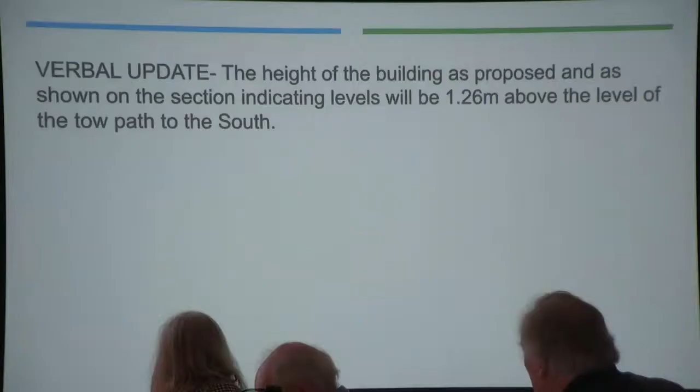The site is located to the north of the canal and to the south of the railway line. It's within the conservation area, the Bath World Heritage Site, and a site of nature conservation interest. The site is not within the Greenbelt.

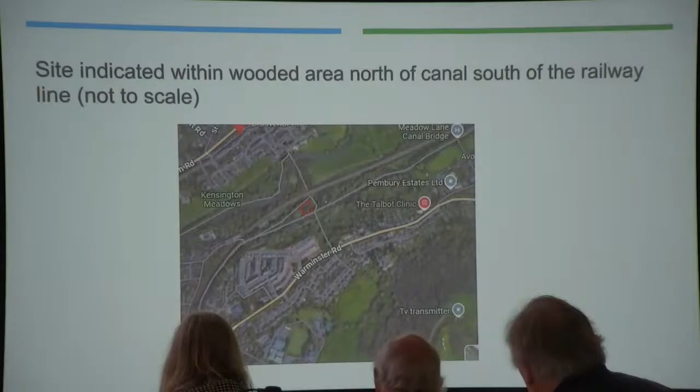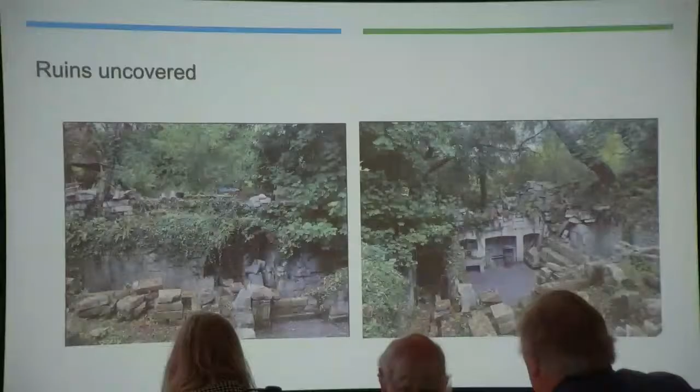The whole site, within the blue edging, as shown on the initial plan, is now the subject of a TPO.

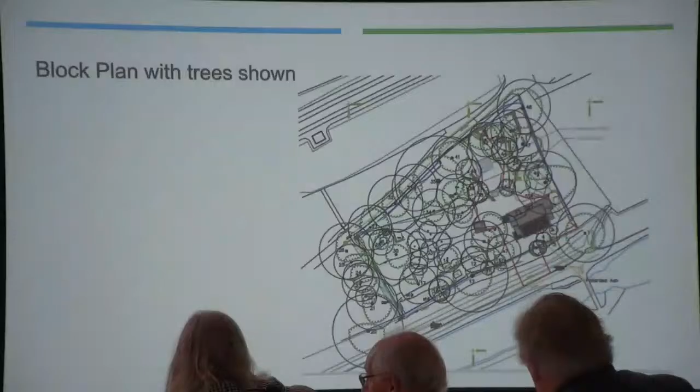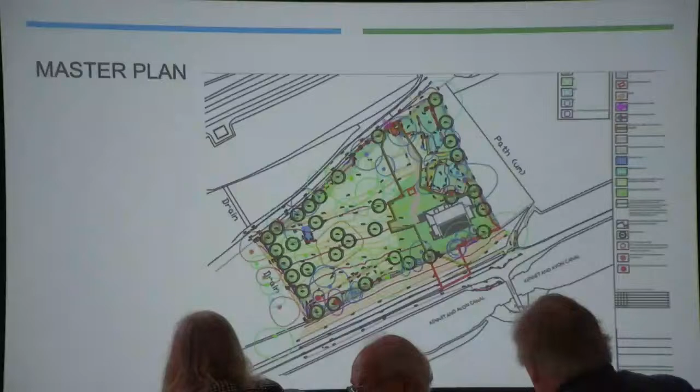A question has been raised - obviously there's a lot of ash trees on the site, so the tree officer did raise the point that there may be a lot of trees that will need to be removed due to ash dieback.

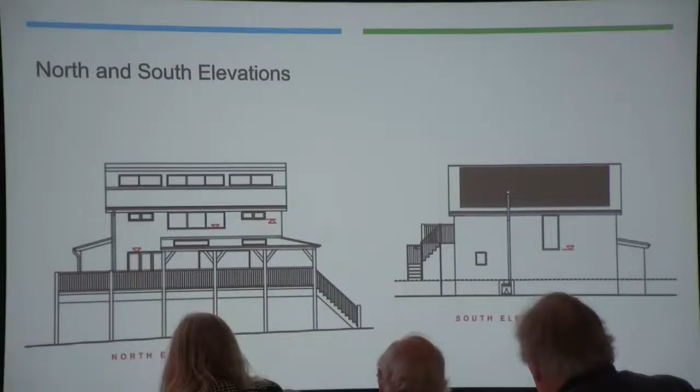I think it's probably a little bit clearer when I show you the side elevations. As you can see, the south elevation is sort of at the top of the slope, whereas the north elevation will be cantilevered out because of the topography of the site.

The building will be built of hempcrete, an off-white lime plaster. The roof will be natural slate. There'll be solar panels on the southern roof slope, and there's a 2-metre wide veranda across the northern elevation. The single-storey elements will be constructed of Bath stone, with a single-storey element at each end of the property.

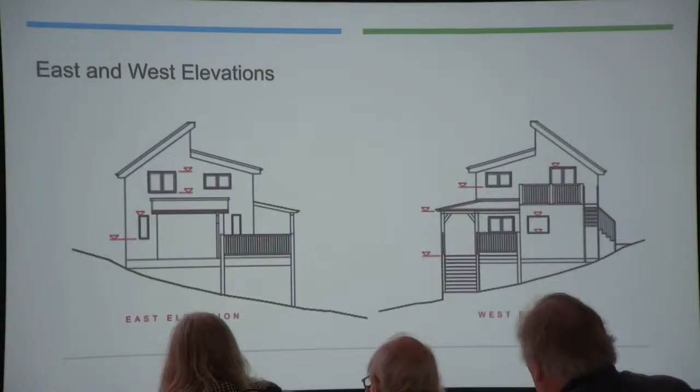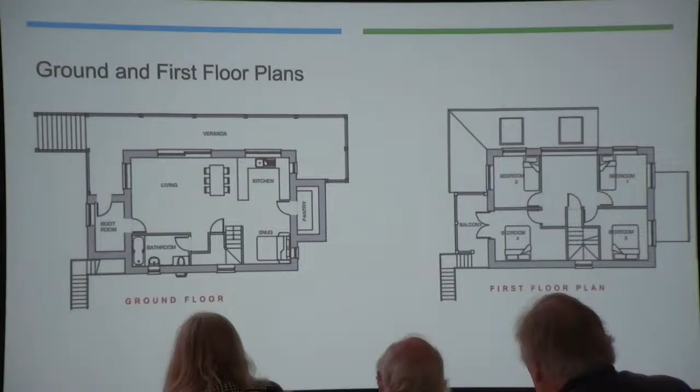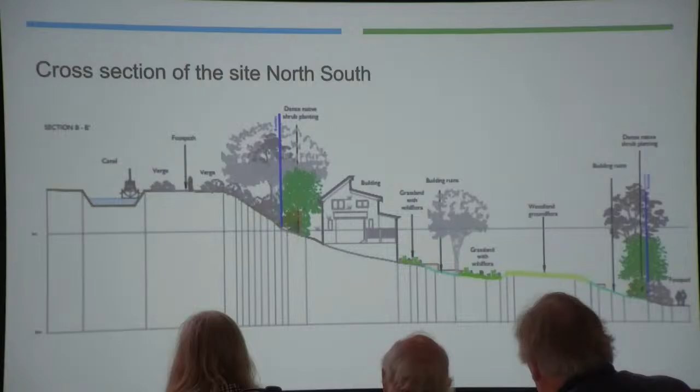This is a cross-section going lengthways through the site, and just shows that actually where the house is sited, the site is relatively flat. So as the site goes down the hill, it's fairly flat across, as it runs parallel to the canal.

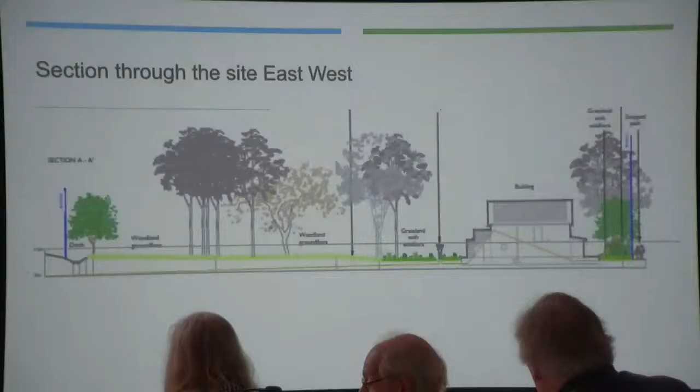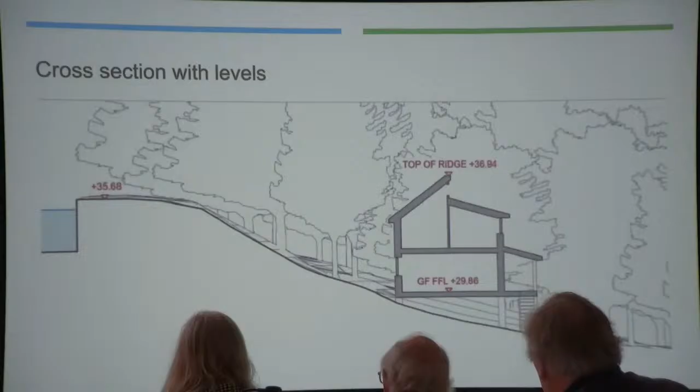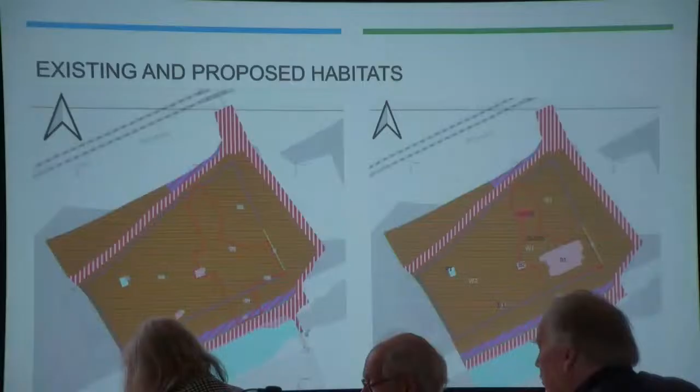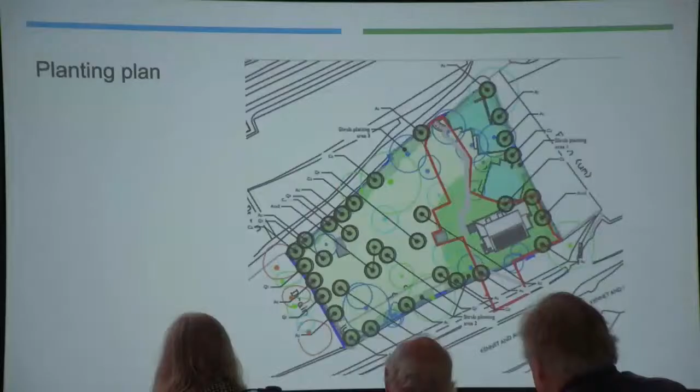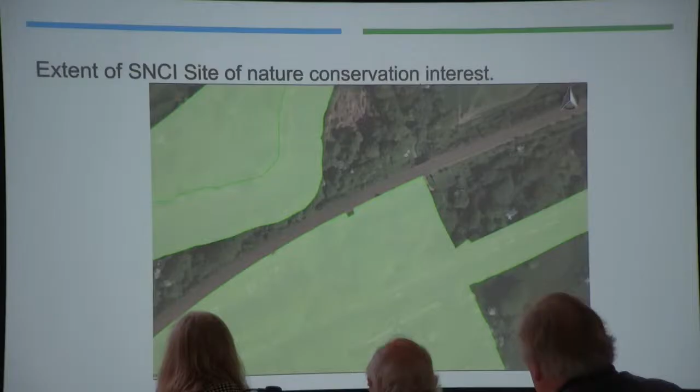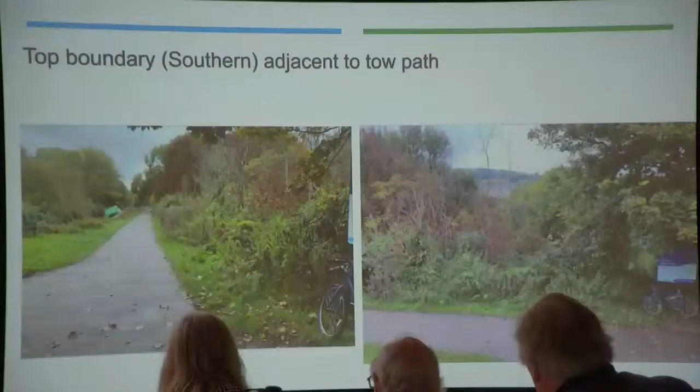Got some photographs now. Because the site is fairly heavily wooded it's quite difficult to get photographs, but hopefully this gives an indication of what we're looking at. So we're looking at the towpath, looking west with the site on our right-hand side, and the right-hand photograph is looking down towards the site, which is set down below us.

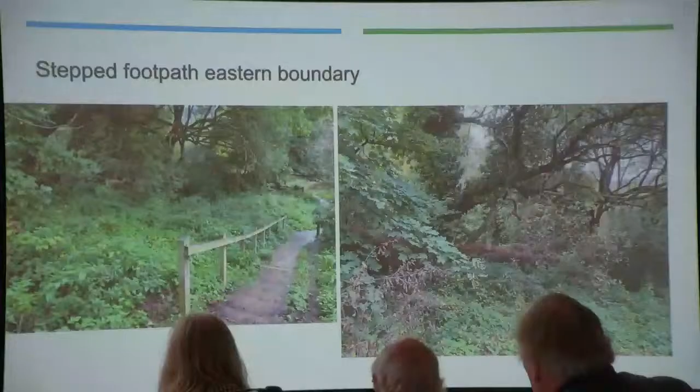Once you get down to the bottom, you have the archway of the railway line, and then the footpath turns. You can carry on straight under the railway line, or turn left, and it goes towards Hampton Row.

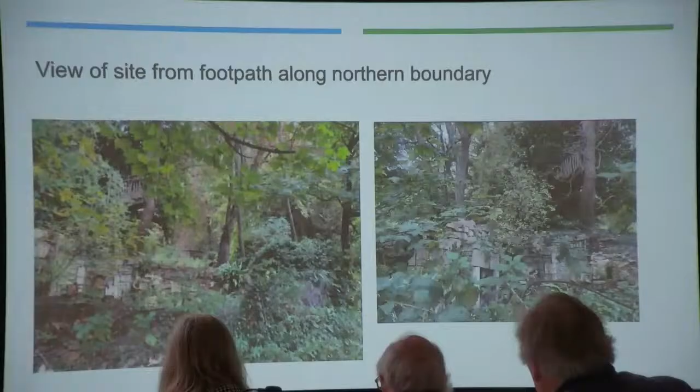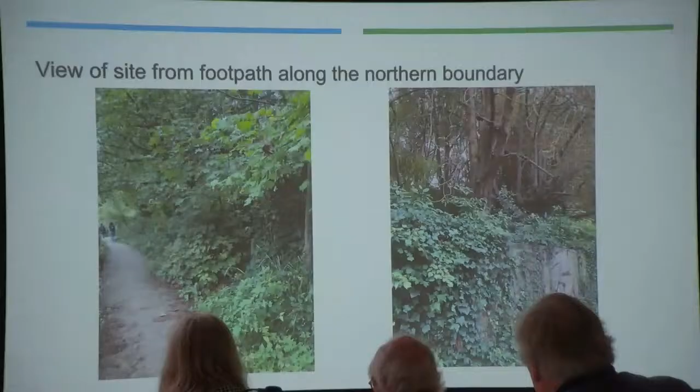As you walk along the bottom footpath, which runs along the northern boundary of the site, these are some views into the site, and you can see the lower ruins which have been uncovered. Again, this is walking along the lane at the bottom of the site, along the northern boundary, and these are views of what you see into the site.

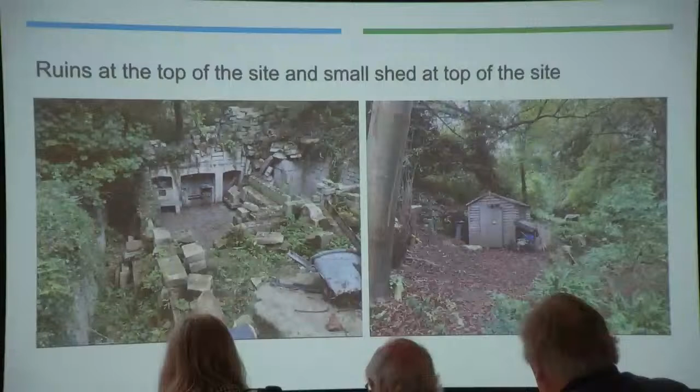Once in the site, at the bottom end, if you look to the right there's an area with a very large tree, and just at the moment there's a trampoline there. To the left there's part of the ruins which have been uncovered. As you get to the top of the site, there's a small shed, and there's also the larger ruins which have been uncovered, set down in front of where the new dwelling will be located.

This is the top of the site. There's a shed there at the moment which will be included within the curtilage of the property, and it's just overgrown with trees along the boundary.

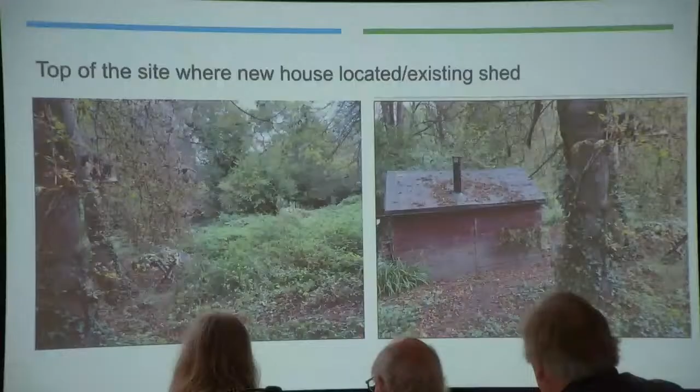This is looking up into the site, so the house will sit within these views as you look up. This is looking from the towpath - you can get down into the site. There's a little staircase, and these are two photographs looking from the stone steps across to where the house will sit.

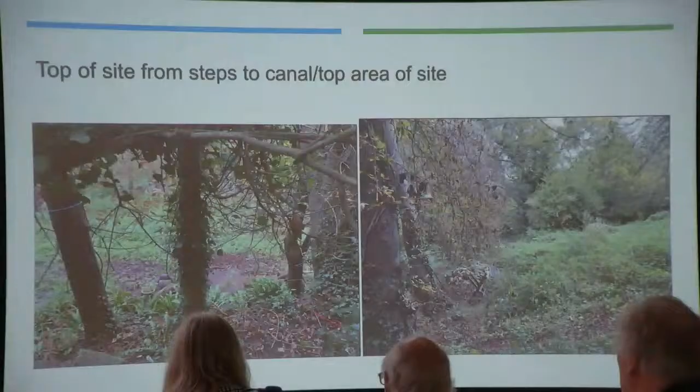The application is recommended for refusal. The reasons for refusal are in respect of the following matters: ecology, the Habitats Regulation Assessment, character and appearance, heritage impact, and impact on trees and woodland. Thank you.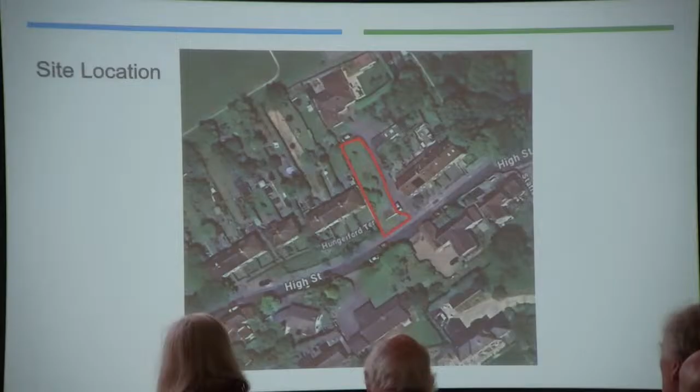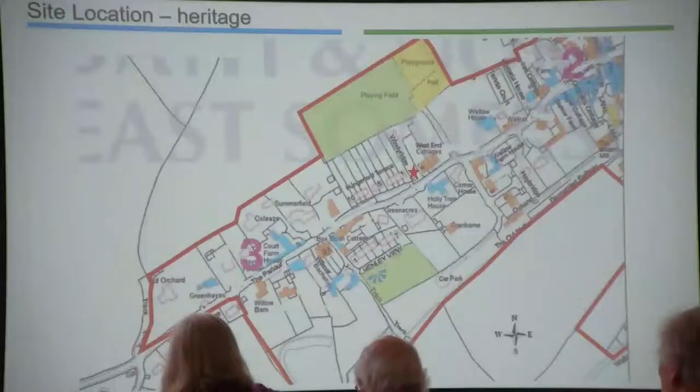So this sets out the heritage context for the site. The site and location of the dwelling is indicated by the red star. The property to the south, highlighted in blue in this image, is the Grade 2 listed building. The orange terrace, known as West End cottages, is highlighted in the conservation area character appraisal for Wellow, which is where this map is taken from. And that cottage is highlighted because of its contribution to the conservation area.

So we have some site plans on the left. We've got the existing and proposed on the right. So the dwelling is sited up the length of the garden. The central area is a dual pitch roof, and then to the west and to the rear we have some 2-storey flat roof sections as well. To the rear there are a couple of outbuildings proposed, one to include the bike store workshop and another garden store, and then parking is to the rear. Access is proposed to be widened to allow for suitable visibility.

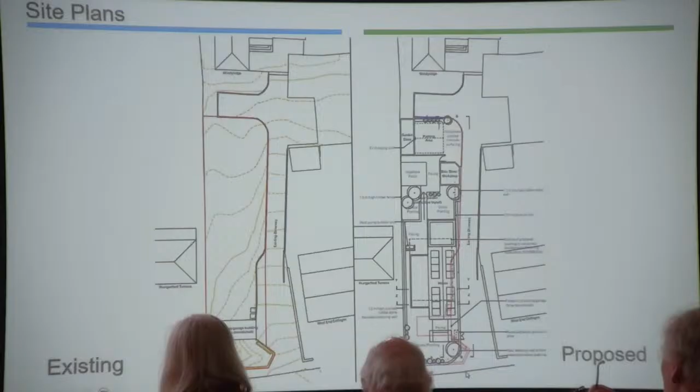This is the existing and proposed street scene, so along the High Street. Obviously at the bottom we've got the proposed. That dashed line which is shown on the proposed street scene is the outline of the previous approval, which is an extant scheme for the site for a single dwelling. And that just gives some context in terms of heights for the previous approval, the proposed, and then in relation to the terraces either side.

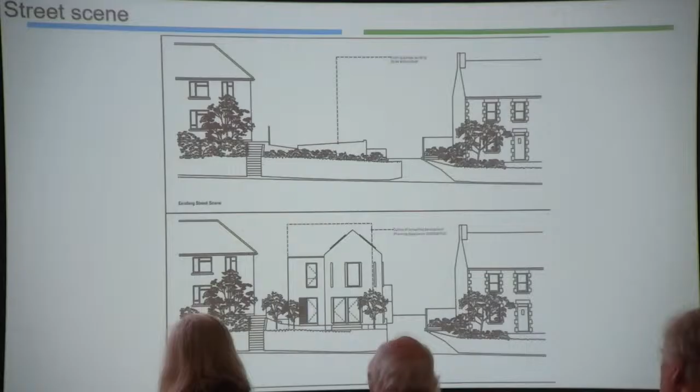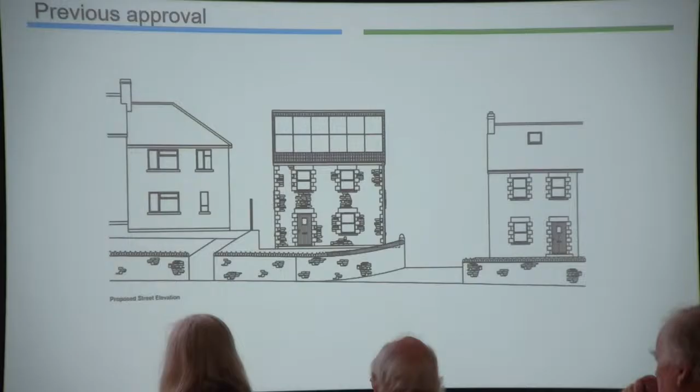This is just to show the extant permission. There have been 2 permissions on site for a dwelling of this nature. This one is the latest one, which is still live and could be implemented.

And then just some site photos. So this is the site in question. The location of the garage is kind of the front portion of the site where the dwelling's proposed, and then it would run up the length of the garden. To the rear, in the background there, you've got the property known as Windy Ridge. We've got the Hungerford terrace to the left of the image, and then we can see the side gable end of the West End cottages as well.

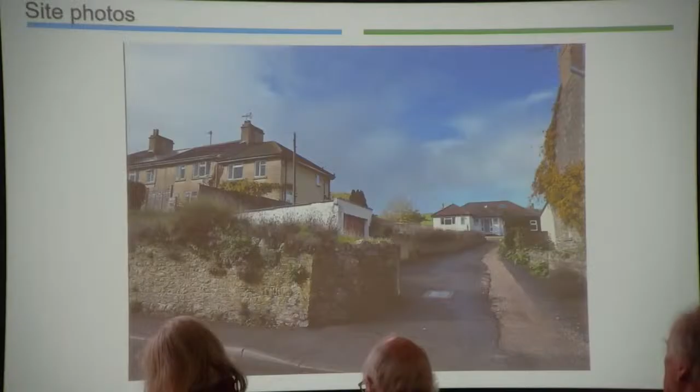And then just a closer up view of the existing garage there, and you can see the elevation of the ground level.

Officer recommendation is to refuse the application. The first reason for refusal is its impact due to its form, scale and massing - it is considered that the design does not respond to the character and appearance of that area or its local context. The second reason for refusal is in relation to the heritage asset, the conservation area, identified as less than substantial harm with no public benefit to outweigh that harm. Thank you.

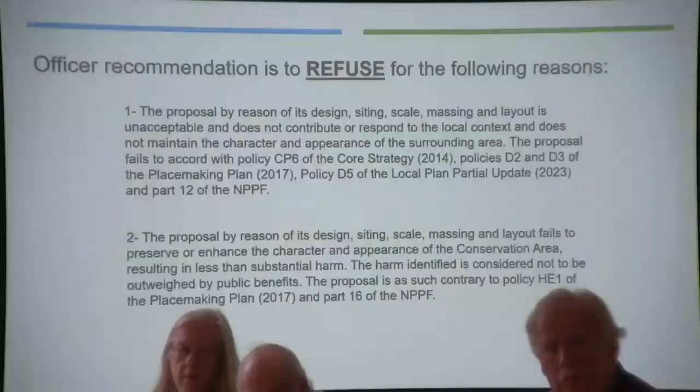I'm Mike Clarkson, I'm a Wellow Parish councillor, and I'm speaking in support of Mr. Rayner's application. When deciding to support the application, the Parish Council's only concern was the choice of orange brickwork as part of the external surfaces, and we note that Mr. Rayner has taken our comments into consideration.

The proposed dwelling replaces a rather ugly garage, and its design, although modern, incorporates features which are typical of our conservation village. The buildings on either side consist of Victorian cottages and post-war social housing and are without any great architectural merit. Therefore, the new design doesn't detract from the immediate surroundings.

The west end of the village contains an eclectic mix of older and modern designs, and we feel that the proposed dwelling, which incorporates a number of 21st century environmental benefits, adds to the interest and diversity of that part of the village. Wellow Parish Council is keen to encourage the construction of additional family dwellings within the constraints of infill and the housing development boundary. Therefore, we urge the committee to permit the application. Thank you.

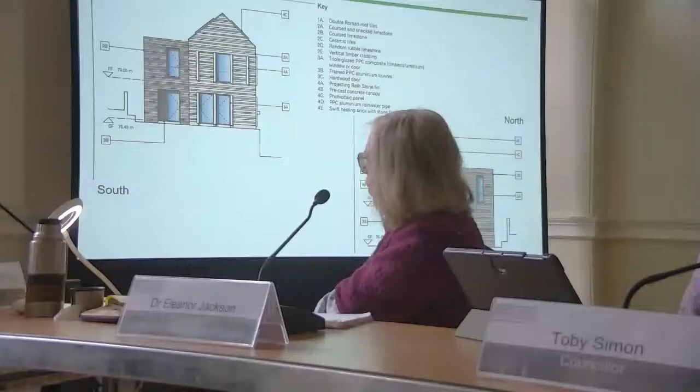That is 2C. If I can find 2C, there it is. So that is, 2C is labelled here, so we follow this up next to the front door. A small section.

Okay, any other questions to anybody? Councillor Simon? Thank you. If there is an extant permission which we judge also might cause less than substantial harm to a heritage asset, are we looking at the increased level of harm or the total level of harm in assessing any impact on the conservation area and heritage asset?

Yes. What I would say, Councillor Simon, is that you judge this application on its own merits. So I wouldn't, whilst it's helpful to see what has been approved previously, and obviously consistency is an important material planning consideration for the council, this must be acceptable on its own merits if it's to be approved, and as officers are recommending, we don't believe it is.

Councillor Jackson? This proposed dwelling is in the Wellow Conservation Area, is it not? So should we not rather be considering whether it preserves and enhances the conservation area, which I will, when we go to debate, argue that it does.

So you showed us a visual which indicates that the house is set back away from the access road. I'm just trying to figure out the distance between the house and that wall, or how far away it's set back from the road. Because that plan there...

I don't have the exact distances. However, the front elevation is here, which is that gable end, and then the very front of the West End cottages you can see in the corner where my cursor is. So it is set back very slightly from that front elevation and aligns with the access route on that side elevation. It's worth also noting that the visualisation is not an accurate representation. It's not been done as an LVIA, it's just a CGI visualisation, so we can't confirm its accuracy.

I accept that, but is the side access from this house going straight onto the road, or is there a pathway and then the road? Because that sort of indicates to me - is that indicating that the side door goes straight onto the road?

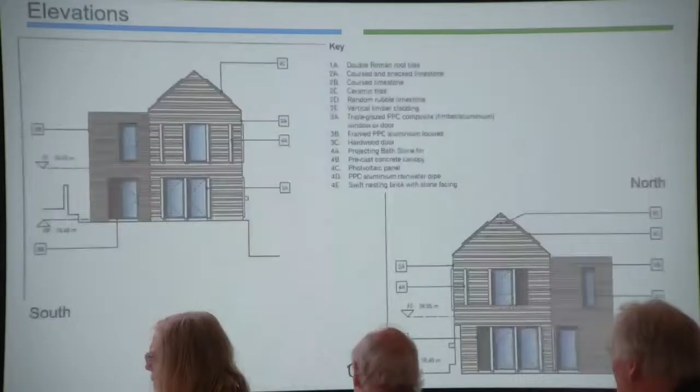The visualisation shows that there's a pathway that runs alongside, separating the house from the road. I think that visual does appear to be like that. It gives that indication. It may just be the case that the different coursings are the walls retained, and then it goes into the side elevation. What is proposed is that side elevation runs completely along the access route - it is an access route, it's not a road. Okay, thank you.

Councillor Simon, sorry, I should have asked this earlier - did this go to a design review panel, or did the officer suggest that it should go to a design review panel? It did not go to design review panel, and that wasn't a suggestion by officers.

Okay, we're now open to debate. Councillor Gourley, your ward councillor, you are open to debate. Yeah, thank you. It's an interesting one, isn't it? I acknowledge the support that Wellow Parish Council have given this, and there are other modern buildings within the village constructed very recently.

So I accept all this. I noticed that the applicant has changed the design in response to some of the concerns, particularly removing the amount of ceramic tiles there is. My concern with this is the siting.

It may be level with West End cottages, but it's not level with Hungerford Terrace, which is to the left-hand side. I think the impact on them will be quite considerable - you can't really see it from this angle, but it sits very much forward, very much proud of them. So I'm worried about their amenity. I'm also concerned about the actual bungalow, Windy Ridge, and the impact on that.

Please do, thank you. Oh, I see. Now I've got it. Beg your pardon. Okay, do you have a seconder? Councillor Simon? I'm not going to directly second Councillor Jackson's motion at the moment, but I do support her approach.

But I have concerns about committee members who are not qualified architects taking views about architectural merits. I also would understand that we would have to delegate permit. It wouldn't be a direct permission because there will need to be a suite of conditions.

I'm supporting Councillor Jackson's wish that we give a green light to this, but I'm going to invite her to agree that we defer consideration for referral to a design review panel, to see if the concerns of officers can be mitigated, and in any case to agree conditions. And I would certainly ask her to change her motion to delegate to approve if she's not with me on deferral for the design review panel.

Do I have a seconder for the motion moved? Councillor Warren? Yeah, happy to second this. I'm not quite sure what the last conversation is all about, really. We're looking for a seconder. I'm just a bit concerned about it. You talk about being an architect.

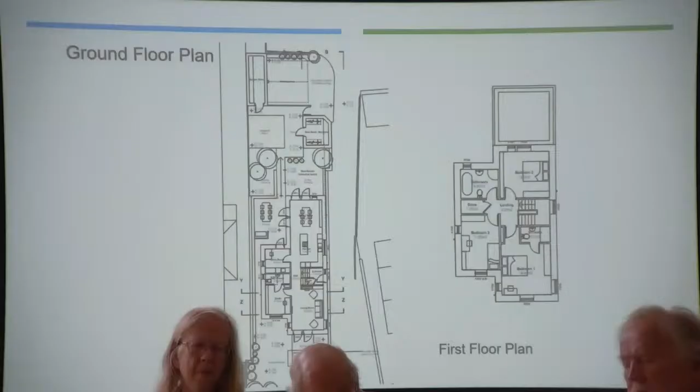Any further speakers? Councillor McPhee? Yes, I agree with the last two speakers and will oppose the motion. Councillor Jackson, you're summing up.

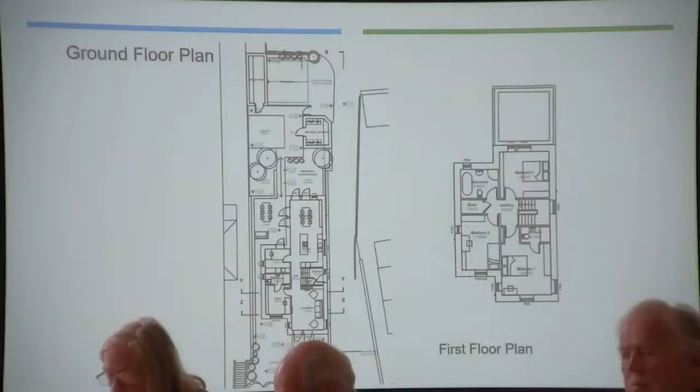I know you shouldn't make this personal, but after 16 years on this committee, and with a son whose actual profession is doing these visualizations and constructions, I feel entitled to a judgment, whether I'm a qualified architect or not, which I am not. It would be a great pity if this is thrown out for being a bit further forward than Hungerford Terrace. Yes, it will have an impact, but you have to weigh the pros and cons. On balance, given it will make a contribution to the conservation area, we should be supporting this one.

Okay, we're going on a vote for motion to approve, delegate to approve. Those in favour of delegate to approve? That's four of us in favour. Those against? Three against. Those abstaining? That is carried.

We'll move on to the next item on the agenda now. We're looking at Dane's Lane in Keynsham, and Chris Masters will actually present. Oh, sorry, Rebecca.

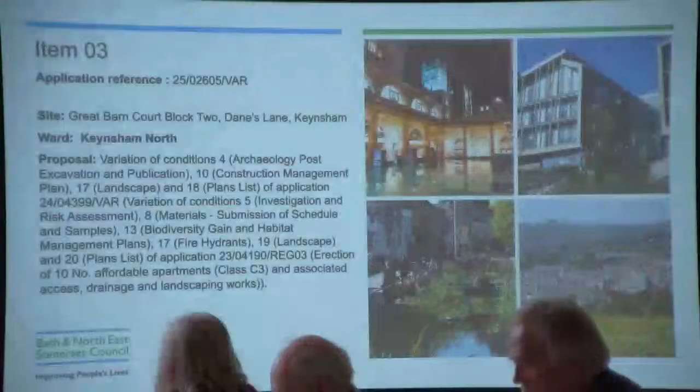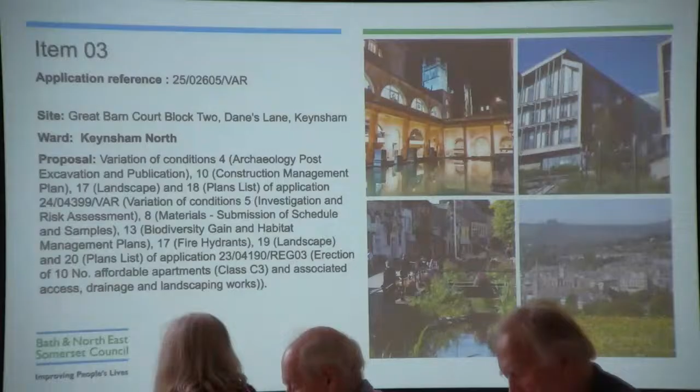Thank you, Chair. Item number 3 on the agenda this morning is a Section 73 variation application at Great Barn Court, Danes Lane. The original permission was approved unanimously by committee, and the proposal was for the erection of 10 affordable apartments, associated access, drainage and landscaping works, in 2 blocks.

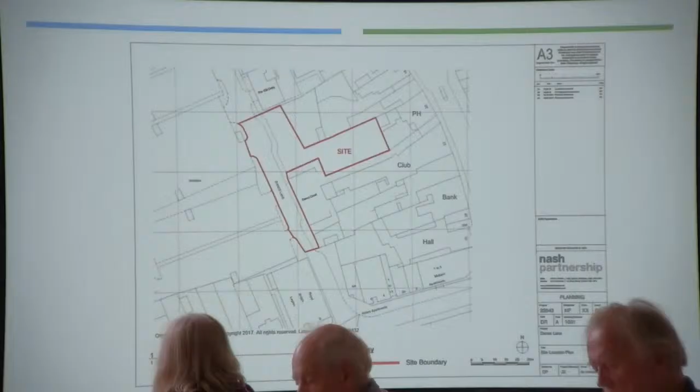So this is an outline of the site. It's located within the Keynsham Conservation Area, on private land which forms the car park of the Tesco store. There are a number of listed buildings in the vicinity as well.

I've been asked to give a brief run-over of the history of the site. As you can see, the original permission was granted in May 2024. Subsequently, there have been applications to discharge conditions from that permission, and there's been a previous Section 73 which proposed a number of changes. Sorry, my screen's gone black here.

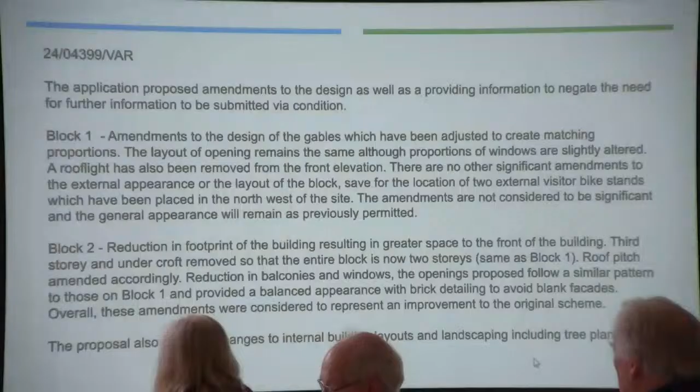There we go. And then there's been a non-material amendment application as well. So just to run through the changes each of those made: the first Section 73 made changes to the design of the gables on Block 1, reduced the footprint of Block 2, removed the 3rd storey from Block 2 as well as the undercroft, which resulted in the roof pitch being amended. There were some changes to the windows of Block 2, and subsequent changes to the internal building layouts and the landscaping. The non-material amendment simply amended the material schedule by changing the roof tile supplier.

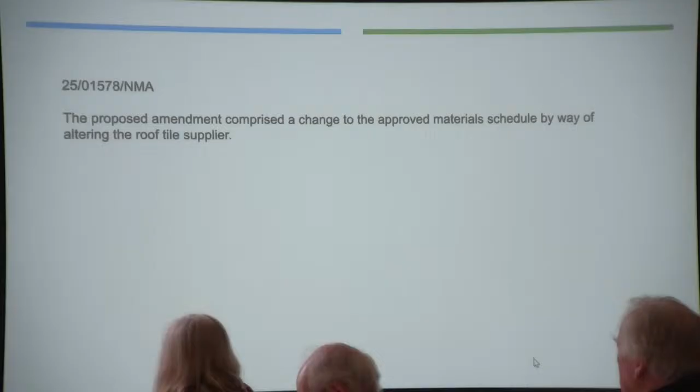So the changes proposed under this current application can be summarised as: the amendment to the construction management plan, showing a revised layout of the site huts, proposed to aid build out of the scheme without the site huts being in the way; a slight update to the position of Block 2 and the finished floor levels, moving it 500 millimetres to the east and 200 millimetres to the north; an updated boundary treatment on the northern boundary, changing from a close boarded fence to a wall; a change to the surface material for the car parking, from brick pavers to tarmac; and information has been presented which allows for the discharge of condition 4, meaning no further information is required for submission in terms of that.

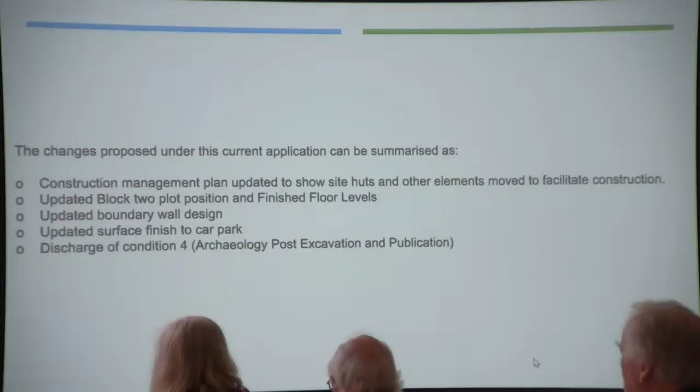So, some comparison plans. This is the construction management plan, as approved on the left there, where you can see the site offices dotted about the site. Those are then rationalised in the current proposal at the access to the site so that build-out can be achieved more easily.

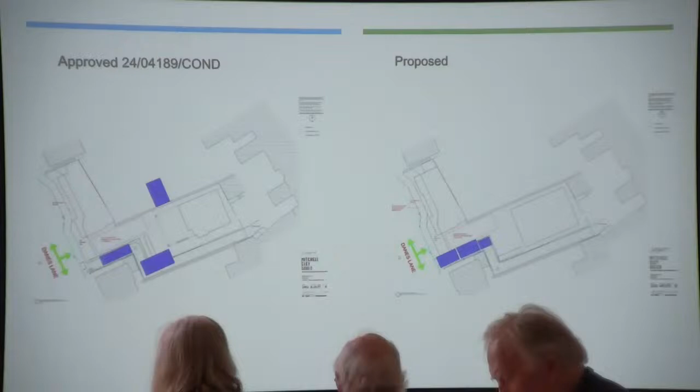In terms of the boundary treatment and the change to the surfacing materials, these are shown on the submitted plans and basically look identical, with a couple of annotations changed - one saying close boarded fence on the left, and the one on the right showing the rendered wall, plus the surfacing material change. The wall will be rendered on both sides using the same material as used for the dwellings, and I've provided a copy of the sample from the materials schedule at the bottom. Essentially, it's going to be rendered in chalk white colour.

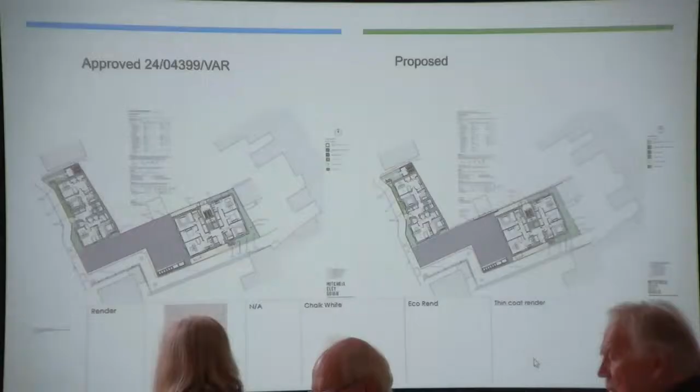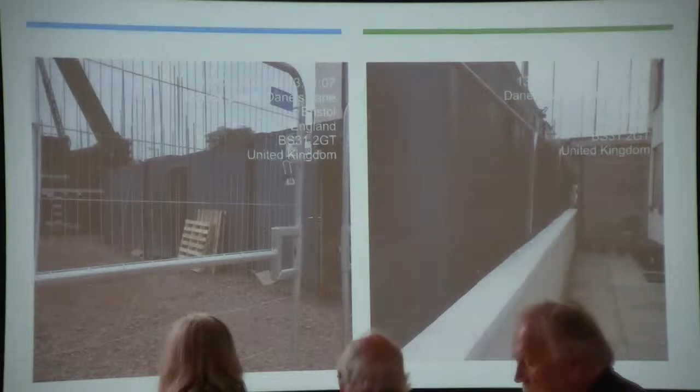This is a view of the site from both ends of the footpath, which is currently closed. The scheme is supported by the Town Council and has no objection from third parties. Officers find that the changes proposed are acceptable, and therefore the recommendation is to permit the application.

Any questions on this? Councillor Gourley asked about the move from paved to tarmac finishes, the permeability, and the runoff, and whether consideration had been given to swales or rain gardens to absorb water rather than it running off into the road and drains. The officer clarified that the material proposed is a permeable tarmac, so runoff from the site would be the same as currently approved, as both are permeable materials.

With no further questions, the item was opened for debate. Councillor Hughes moved the officer's recommendation, seconded by Councillor Warren. With no further debate, the item moved to a vote. All those in favour - the result was unanimous.

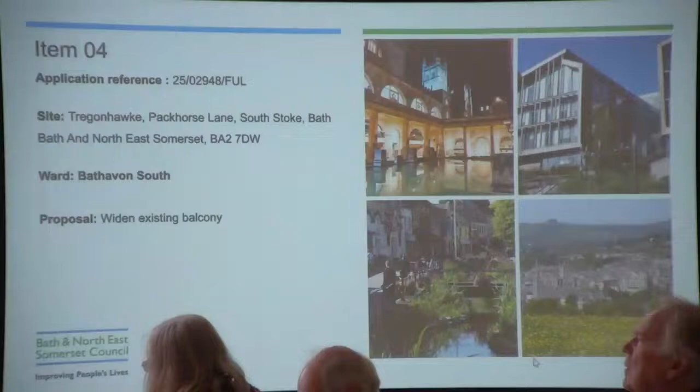The next item is Tregonhawke, Packhorse Lane, South Stoke. Item number 4 is a proposal to enlarge an existing balcony at Tregonhawke in South Stoke. The site is located within the Cotswold National Landscape, Bristol Bath Green Belt, the South Stoke Conservation Area, and in proximity to a number of listed buildings.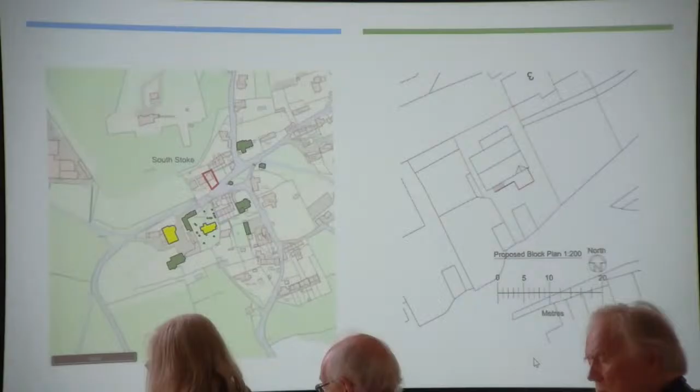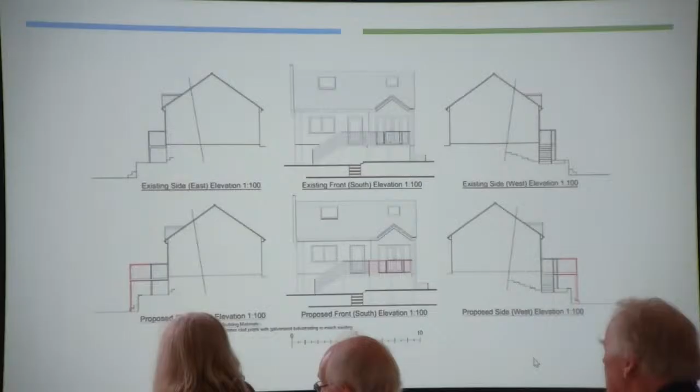These are plans of the proposed development, existing at the top and proposed at the bottom, showing in red where the balcony would come forward. The plans state the building materials are to be timber posts, with balustrading matching the existing, so in appearance it would be very similar to what's currently there. The existing and proposed floor plans confirm the balcony would come forward but wouldn't be any wider than currently exists.

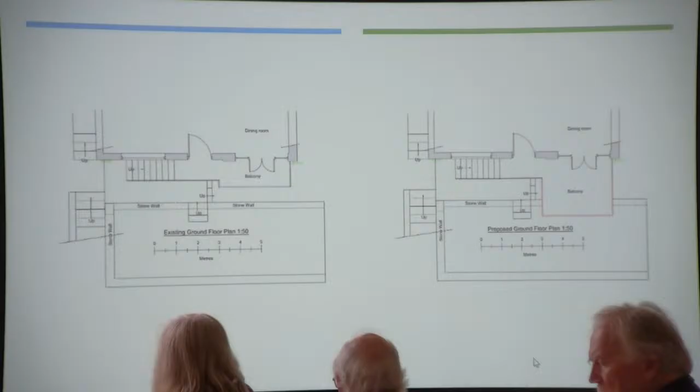I've included some photos on the following slides. I haven't received any concerns, comments or representations from third parties, but I have received concerns from the parish council, included in the officer report. Those concerns were on the basis of potential harm to heritage assets, residential amenity, and potential harm to ecology, particularly because of external lighting.

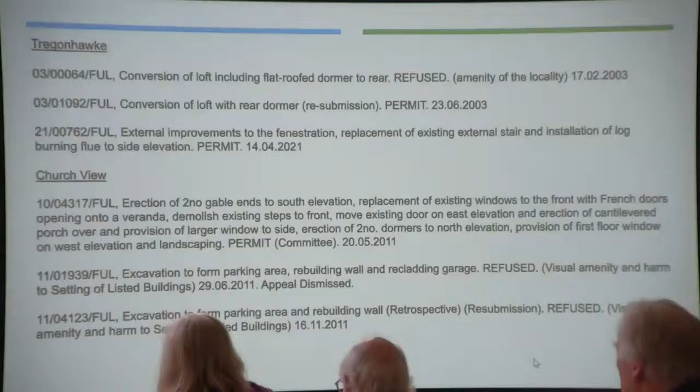Based on the assessment against the various matters set out in the officer report - heritage impacts, character and appearance, residential amenity, and ecology - it's felt the application is acceptable in terms of all policies and is therefore recommended for permission. Thank you. Jeffrey Davies, please.

Good morning, councillors. Thank you for taking the time to consider this application and helping South Stoke Parish Council to resolve the sort of conflict between our residents that arises from this proposal. The essence of the decision is to resolve the desires of the applicant against the concerns of the neighbours with whom I have discussed the application. All those neighbours have expressed their concerns and unhappiness with the proposal, as they will be overlooked and lose significant privacy if this is permitted.

The officer has considered the residential amenity, and his statement was regard is being given to the potential for the development to result in a loss of privacy for nearby residential occupiers. In this instance, the addition is located at the front of the dwelling. Any windows it faces would be on the fronts of properties and visible from the public realm.

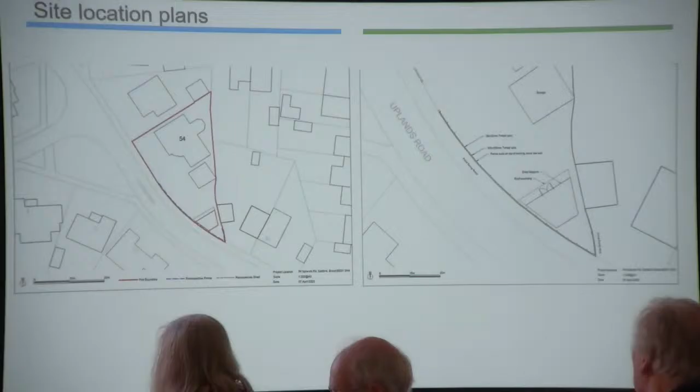The inclusion of a 30 centimetre trellis on top of the existing fence does sort of soften the appearance, and is in accordance with other fences in the locale. It's important to note that they're not actually adding the trellis on top of the existing fence - they're proposing to cut it down and add a trellis on top, which would make the overall height much the same as it currently is, but would obviously change the visual appearance.

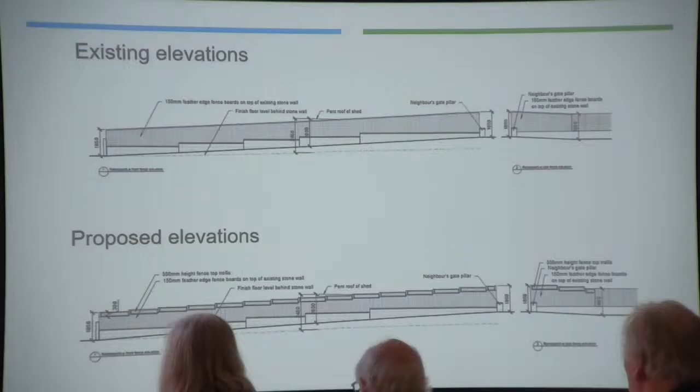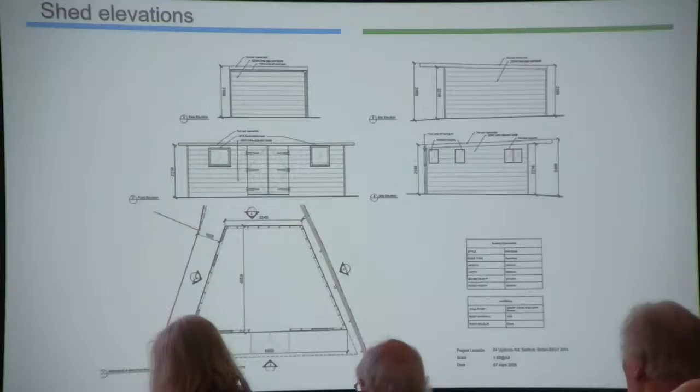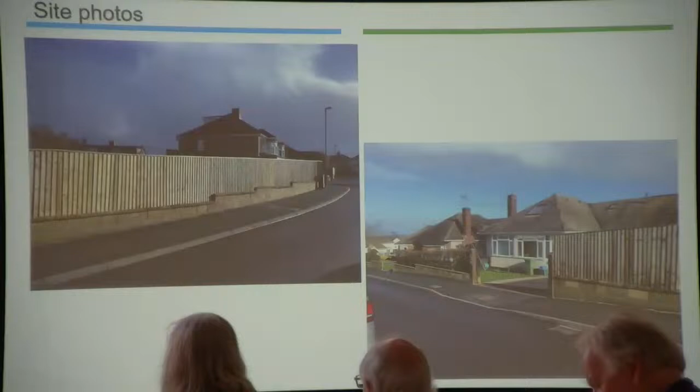Here are some pictures from the outside, from the actual street, along Uplands Road, where you can see the fence as it is. These pictures were taken when I visited the site as part of an enforcement case in, I think it was January this year. It is much the same as it is now.

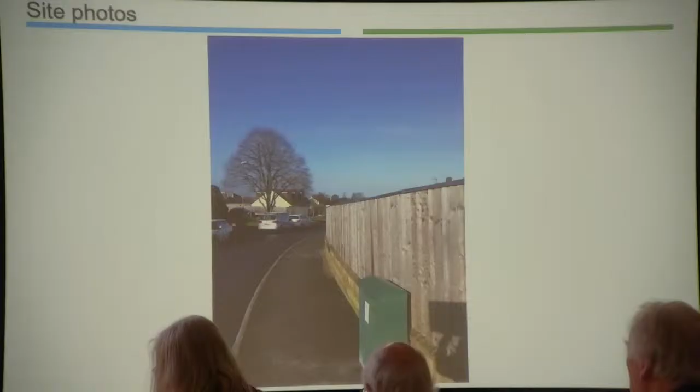This is an image from the neighbouring property, looking north along Uplands Road, as the street slopes away a little bit. You can see it is one continuous stretch at the moment, but that would be altered if this scheme were to be permitted.

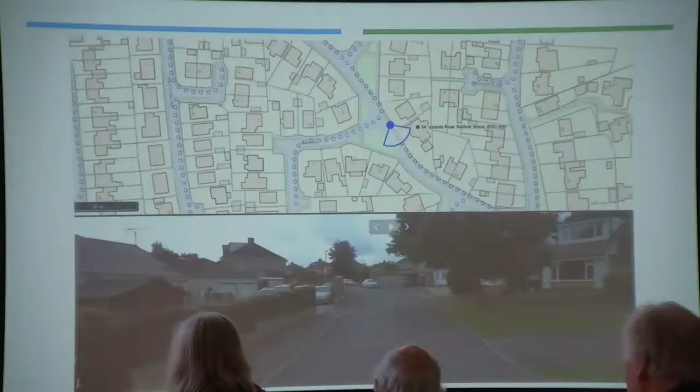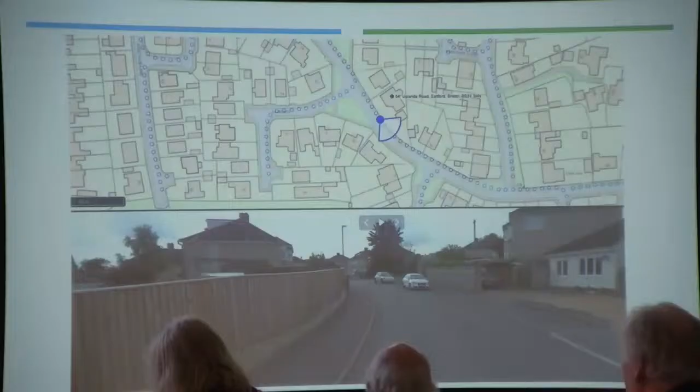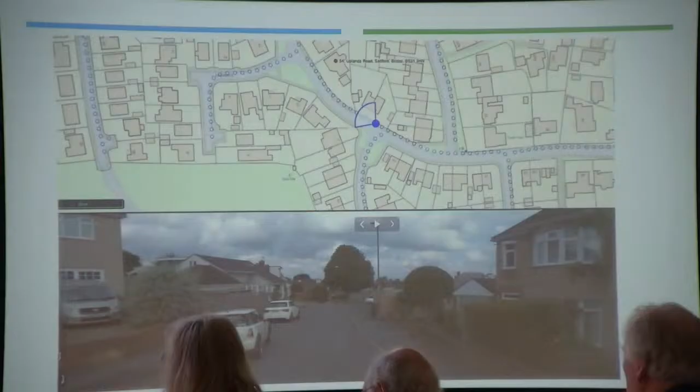This is the same kind of view, but slightly further up the street, showing the curve of the road, which is a 20 mile an hour speed limit, and the two fences on either side. This is a view looking the other way, from the neighbouring property's point of view. The property in the right-hand corner of the bottom picture is the immediate neighbour to the host dwelling. It's obviously a very different style with a much different layout in terms of the garden and garage, but the outbuilding would be located very close to that garage.

This is an image looking up Uplands Road towards number, I think it is 77 Uplands Road, where there is a similar fence, which is quite long in the bottom image. It's not clear that fence had planning permission, however it has been there since at least 2017, so it would be lawful through the passage of time. I did mention in the report that both fences referred to are now lawful, which demonstrates that it may be acceptable in this location.

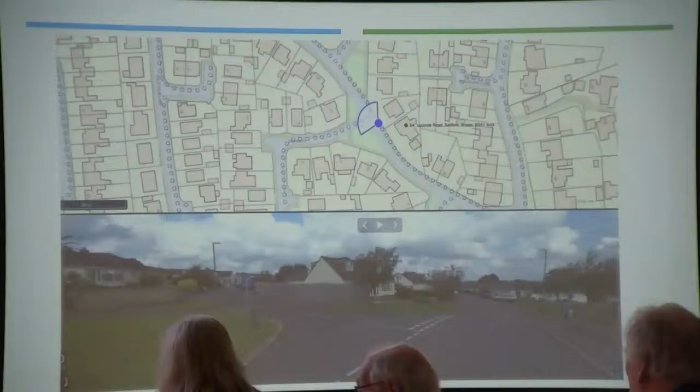The officer recommendation is to permit the application, obviously with the amendments shown in the plans.